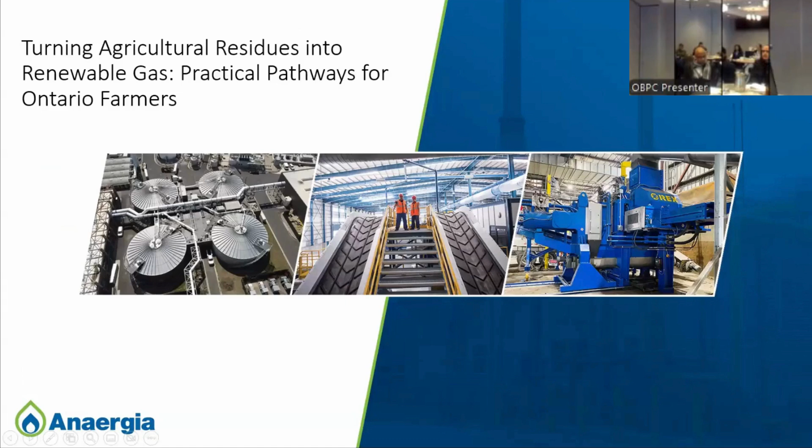Okay, let me just see if I can flip it forward. All right, works perfect.

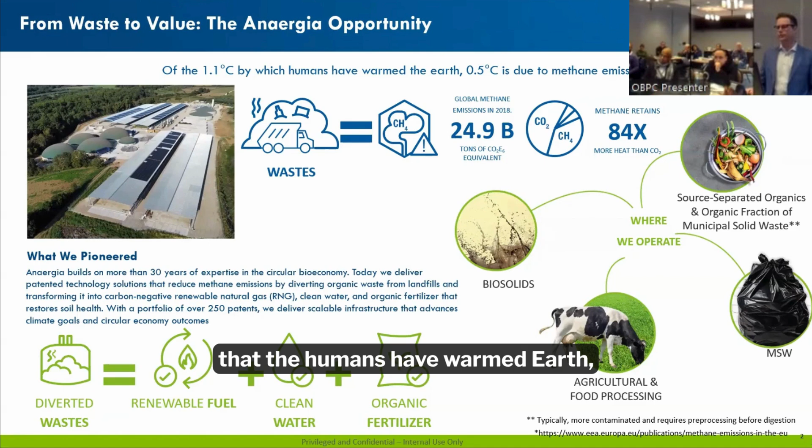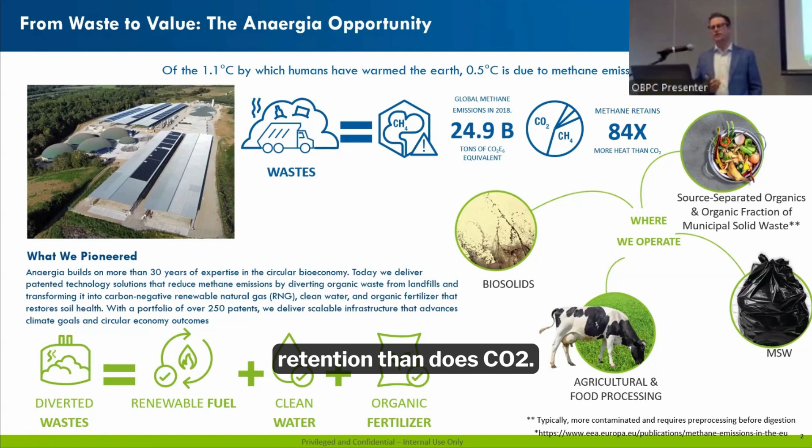So phrasing the problem first, the company Anaergia was developed around the concept of global warming. Of the 1.1 degrees Celsius that humans have warmed Earth, about half a degree comes from methane emissions. Methane emissions are particularly problematic because they have 84 to 85 times higher heat retention than CO2. So it doesn't get a lot of attention, but the actual methane emissions are quite problematic.

Where does methane emissions typically come from? Well, one place is landfills. We now have fairly good technology which comes from satellites, and we can look down on these landfills and watch the methane emissions leaking out of these stored waste facilities. It's actually a Canadian technology as well, called I believe GHGSat or something along these lines.

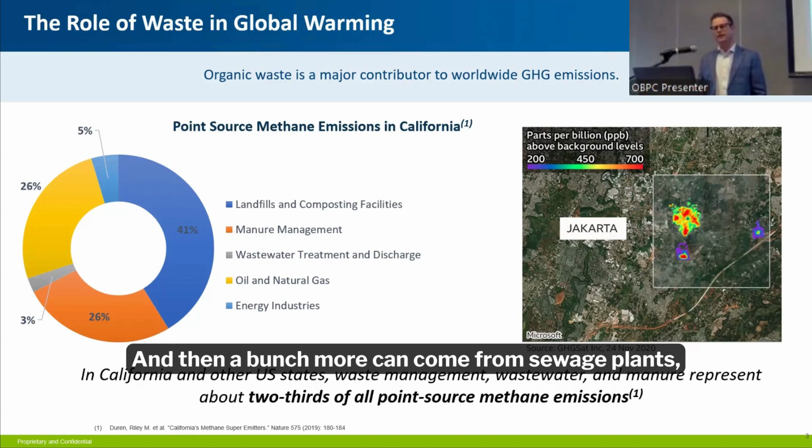41% comes from landfills and composting facilities. Another 26% can come from manure storage, and then a bunch more can come from sewage plants and leakage around oil and gas.

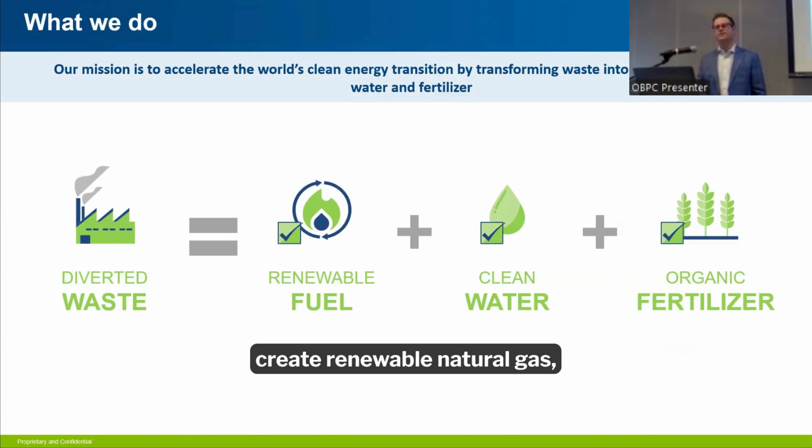So what we're looking to do as a company in general is take diverted waste, create renewable natural gas, create clean water, and then as a byproduct as well, generate some organic fertilizer.

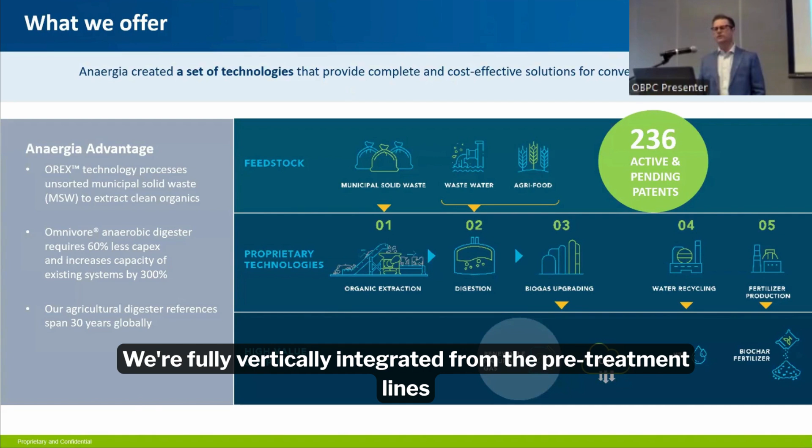Anaergia has a bunch of interesting technologies. We're fully vertically integrated from the pretreatment lines all the way down to the upgrading side of things, including some production of fertilizer products. But our real core technology is around the anaerobic digester.

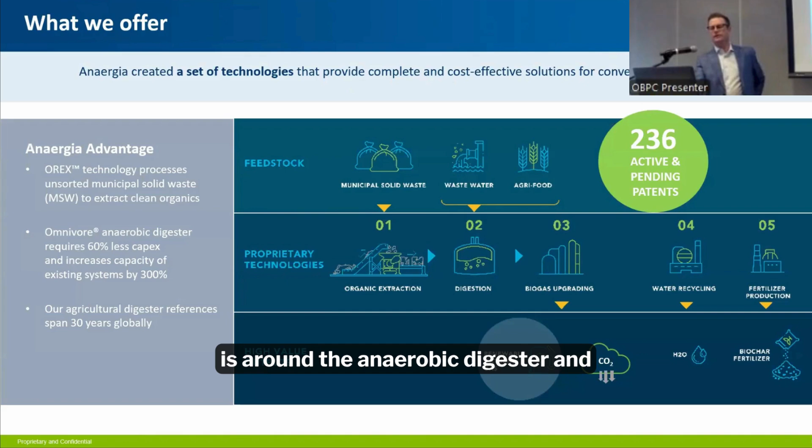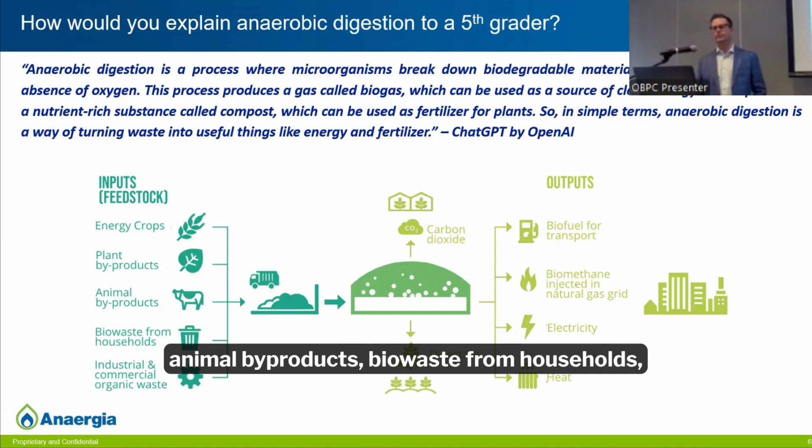Now we'll get into a more generalized view. So that was the company pitch, but now let's talk about anaerobic digestion in general. Here's a general block flow diagram, we would call this. You can see some of the feedstocks: energy crops, plant byproducts, animal byproducts, bio-waste from households, industrial waste.

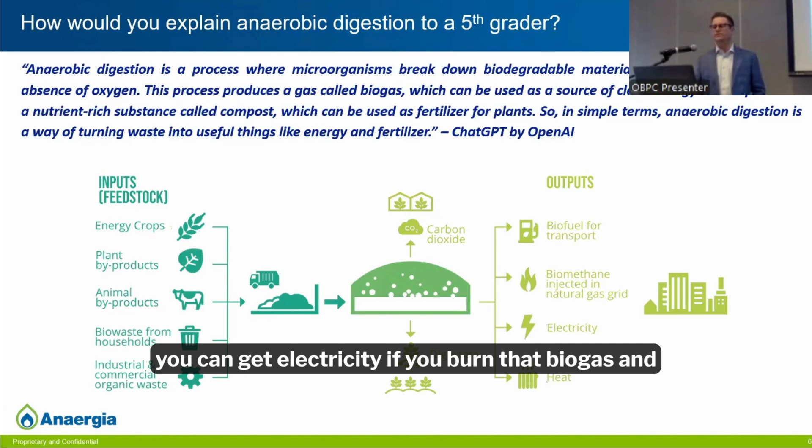Put it all into a tank that has no oxygen, and out of it you can get your renewable biogas. You can get electricity if you burn that biogas, and you can also get heat if you burn that biogas. And then we get this nice liquid called digestate, and that can be used as a fertilizer.

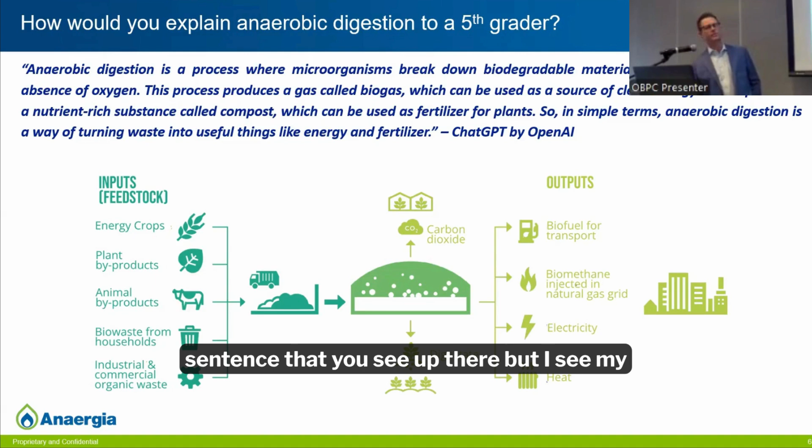Of course, now we all turn to AI for our answers, and if you ask AI how to describe anaerobic digestion to a fifth grader, it's a sentence that you see up there, but I see my face is cutting off at least a portion of it.

So why anaerobic digestion? I do truly believe that it's the right solution within the value chain for organic waste. You get to take manures and agricultural residues like straw, stover, spoiled crops, and you can even purpose-grow some secondary crops as well and turn it into renewable electricity.

It's also nice because it's decentralized. Most cases you have anaerobic digesters either on farms or somewhere at a municipal wastewater treatment plant. So you're not creating the electricity all in one large mega plant.

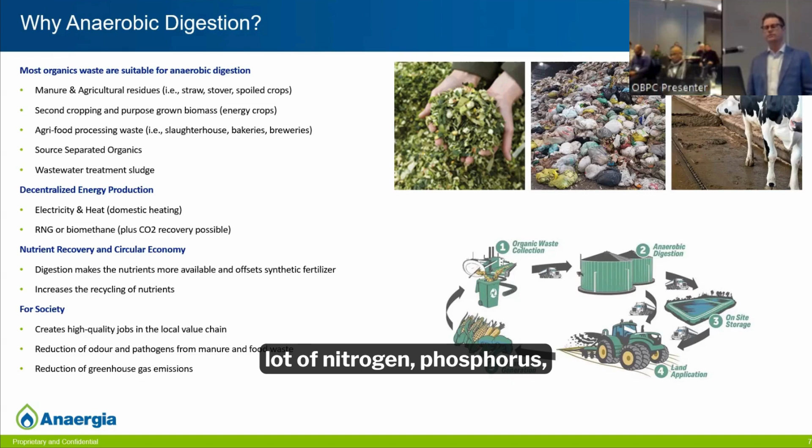And then nutrient recovery - you can pull a lot of nitrogen, phosphorus, potassium out of anaerobic digestate material. And then from a society perspective: new jobs, green economy, and an overall reduction in greenhouse gas emissions, like I mentioned.

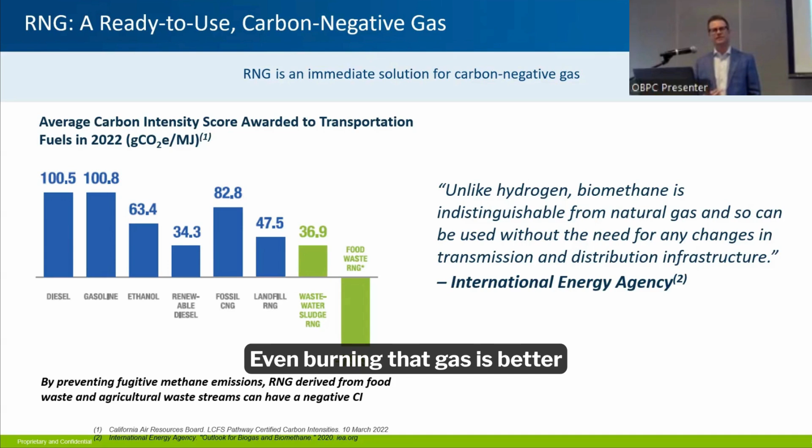There's lots of talk out there about what's the best green fuel on the market. What we know is renewable natural gas is about the only carbon negative fuel on the planet, and it's hard to understand how burning a fossil or burning a gas can create a negative emission. The reason, if we go back to the first slide, comes from the fact that methane has such a high global warming potential. Even burning that gas is better than letting it release to the environment.

So we are taking food waste that would otherwise rot in a landfill, converting it into renewable natural gas, and offsetting a fossil gas.

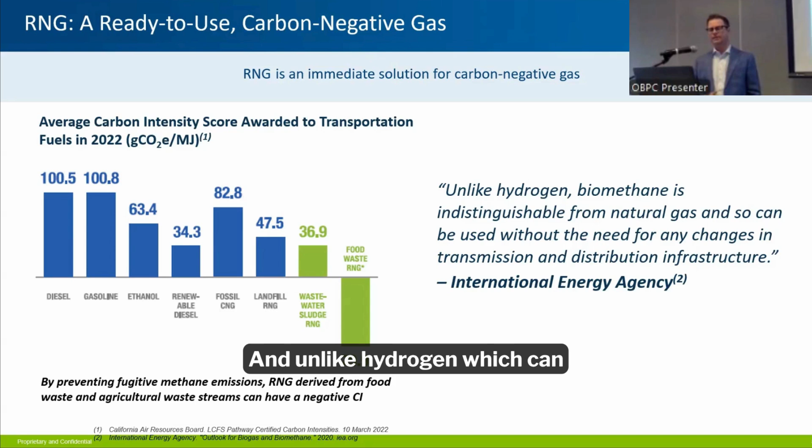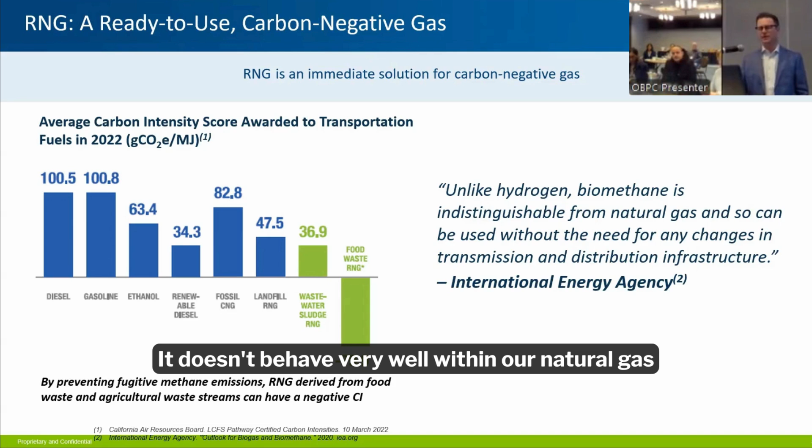And unlike hydrogen, which can be considered another green alternative, it is very compatible with our existing infrastructure. Everybody has natural gas for the most part, at least in cities and industries. We have natural gas. Hydrogen is a little trickier - you can't transport it very easily, and it doesn't behave very well within our natural gas grids, but we do have existing natural gas infrastructure.

So a little bit about the technology side of things. Anaerobic digesters appear in a few different forms. This is a very typical type. You'll see these at a lot of wastewater treatment plants, and at most of the on-farm digesters across Canada and certainly elsewhere around the world.

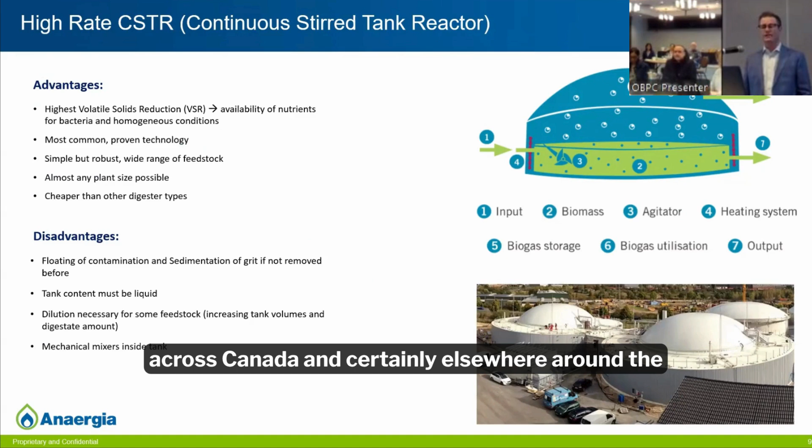These are CSTRs, continuous stirred tank reactors. They are essentially a big tank. They form some kind of agitation. You add your feedstocks into them, you mix, biogas comes out, and then periodically you pull out the material, which we call the digestate.

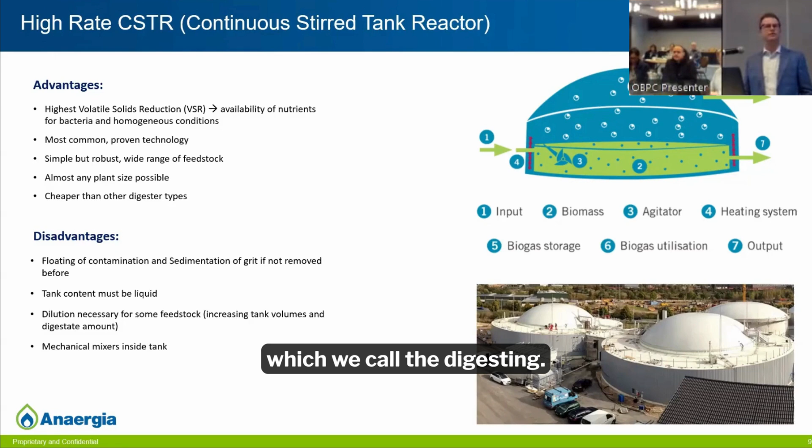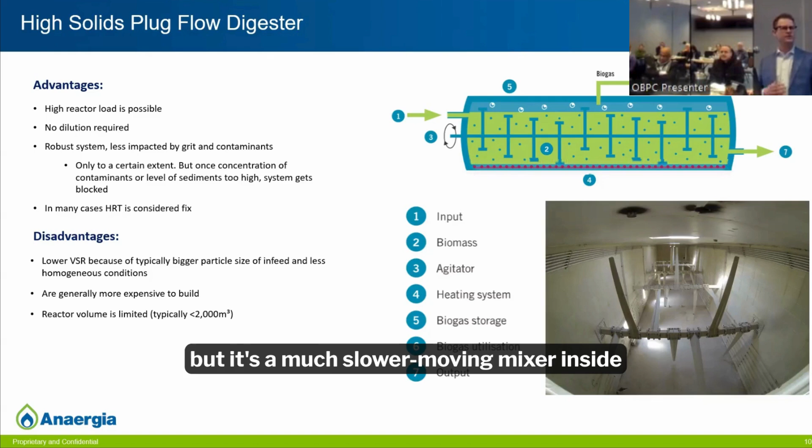Another type is called a high solids plug flow digester. These ones are more like a highway. You add the material at one end of the digester, and they continuously move down the pathway all the way to the other end. You typically do have a mixer, but it's a much slower moving mixer inside of the digester. And this one helps to break down crust formation and pull material under the digester.

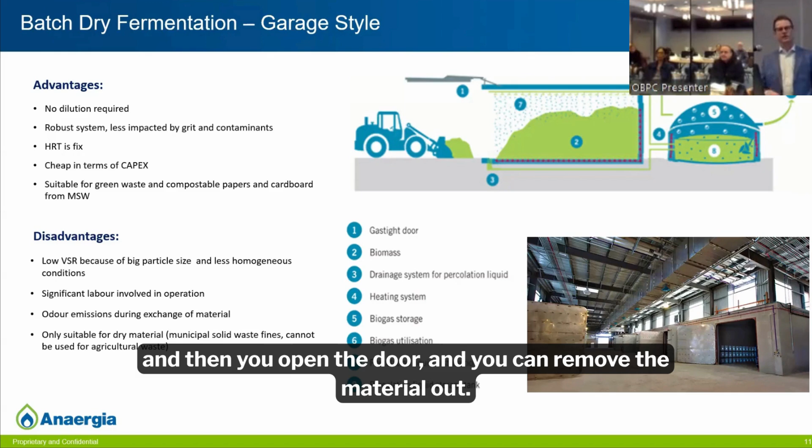There's also another type called garage style or batch dry fermentation. This is more typical in MSW, municipal solid waste. So where you would take kind of very crude, dirty looking material from municipal solid waste, you put it into these big garages, you close the door, and then you run them for a period of sometimes 10, sometimes 20 days. And then you open the door and you can remove the material out. Much more common in solid waste.

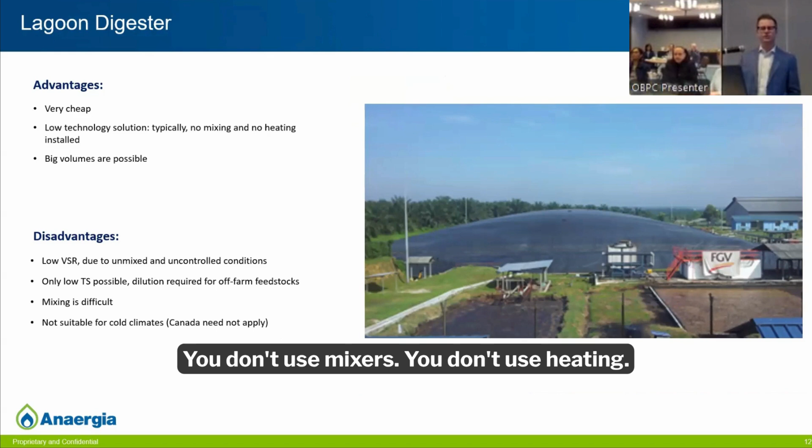And then lastly, the big dairy farms down in the US, the 10,000 cow dairies, they'll use more of these lagoon style. So lagoon style, very cheap, very simple. You don't use mixers, you don't use heating. So they tend to have very low volatile solids destruction, and they can be challenging to manage when they fill up with solids.

So back to the feedstock side. So we know the digesters that we would be feeding around the world. These are generally the most typical feedstocks that you'll put into an anaerobic digestion facility. On the left, you have the lowest contamination, and then far on the right, you have the highest contamination. So your typical manures and harvested crops, they're actually the easiest because they're very pure. They don't contain very much contamination. And in general, they have a modest biomethane potential.

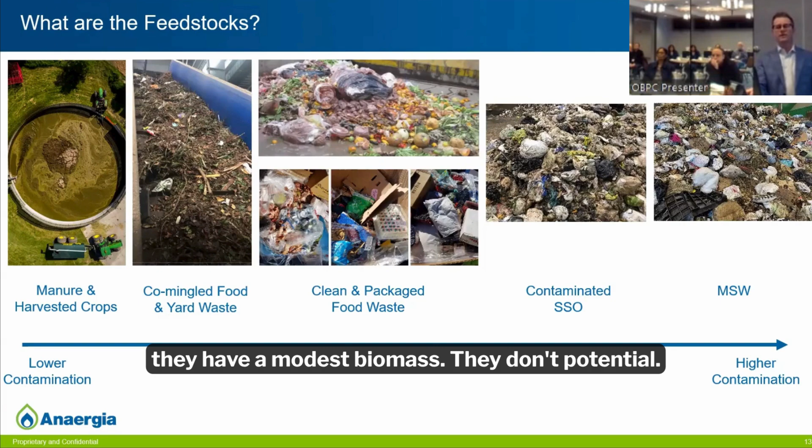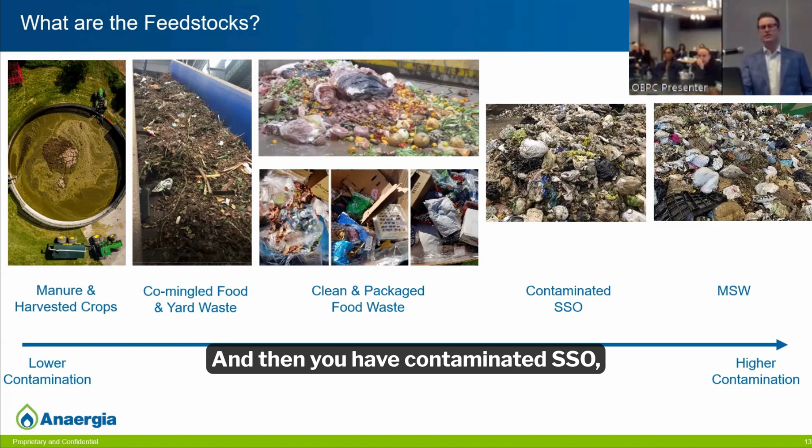As you kind of move along towards the right, you get commingled food and yard waste. This is kind of like your green bin material that you pick up if you're doing a very good job at source separating. And then you get into clean packaged food waste. This is like a grocery store or a cafeteria. And then you have contaminated SSO, which might come from a city collection, and then MSW, municipal solid waste.

So when we talk about the Ontario side, maybe a large or a modest sized dairy of 500 herd, it might produce around 10,000 tons per year of manure. And this might produce about 170,000 cubic meters of RNG.

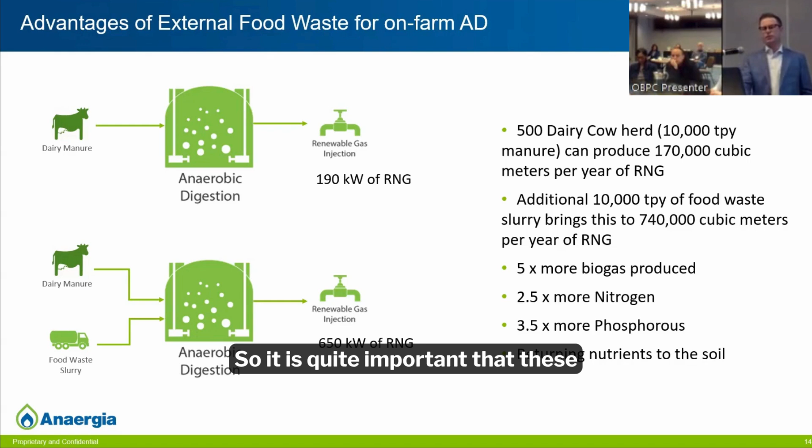What's really important for a lot of these on-farm digesters is the addition of external liquefied food waste. And the reason being is it generates about 5 times more biogas, even if you put in about the same quantity. It also brings in a considerable amount more nitrogen, a lot of additional phosphorus, and those all can ultimately be returned nutrients to the soil. So it is quite important at these on-farm digesters that they do have the ability to bring in external feedstocks.

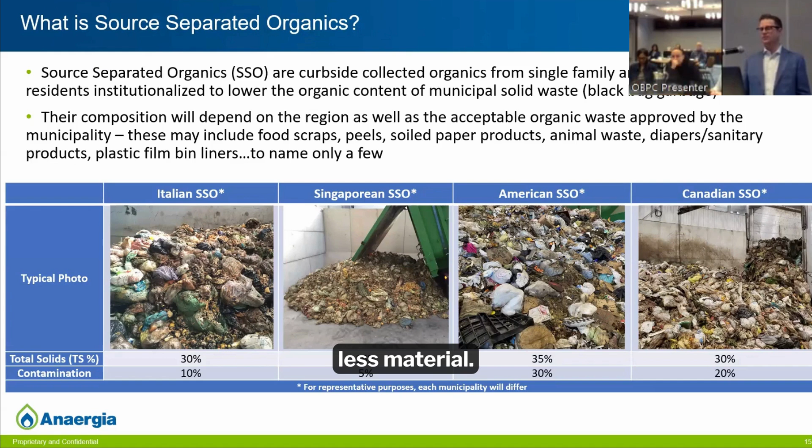Around the world, there's a bunch of different types of curbside collected source separated organics. This is one of the more abundant materials that needs to find a home. You have Italian SSO, which could have a considerable amount of packaging. Singaporean or Asian SSO tends to be wetter with a little bit less material. And then you get the American and Canadian, which tends to be quite dry and quite high in contamination.

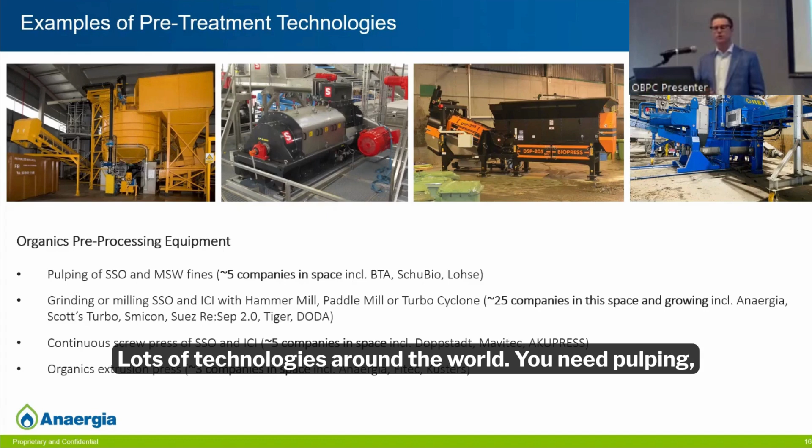So all those materials, believe it or not, can produce a quite clean organic slurry that can be used within anaerobic digestion. Lots of technologies around the world. You need pulping, which is almost like a big smoothie maker. You blend the whole material up and then scrape out the packaging. There's a lot of hammer mill technologies, and there's even some that you exert an enormous amount of pressure on it and you kind of squeeze out the organic material.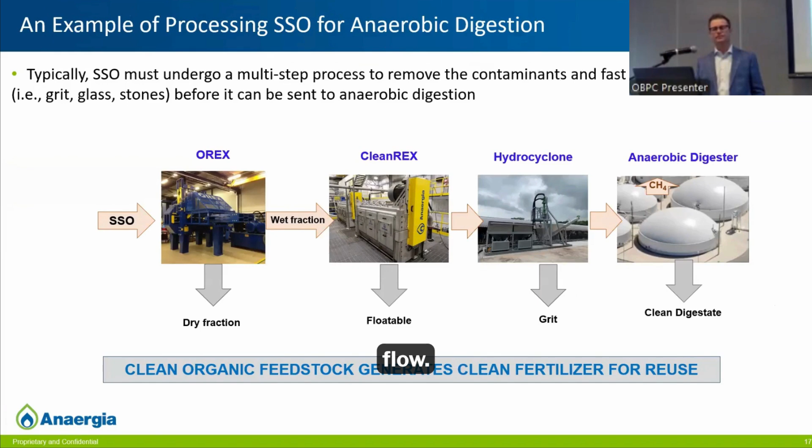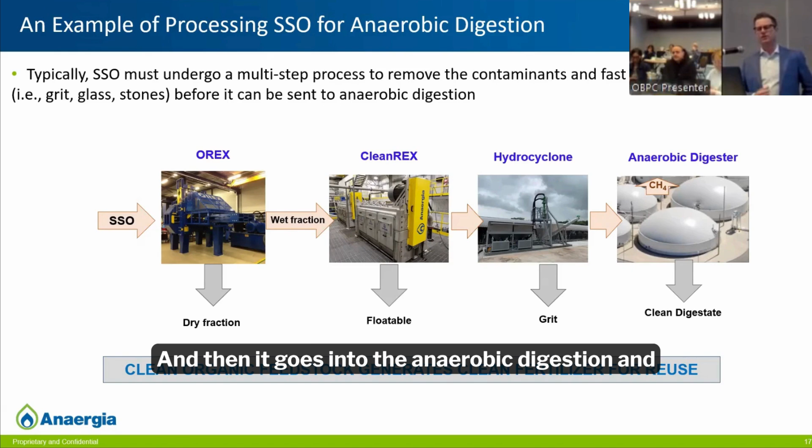So this is just a typical flow. So you'll bring in this source separated organics. It's collected from the green bins. You process it through some type of machine, in this case, for example, an Orex, where you're squeezing out a wet fraction or an organic material. Then you have to polish it. We use something called a hydrocyclone, typically to remove the glass and stone and grit. And then it goes into the anaerobic digestion, and it can create a clean digestate.

So believe it or not, here's what it looks like.

Good thing we didn't go before lunch.

But there's a scoop, a tractor bucket load of what would be considered source separated organics. It has, let's call it, somewhere between 20 and 30% contamination. And those go into pre-processing lines. And that pre-processing line spits out something that looks like that kind of minestrone soup or that oatmeal texture. And it has as low as 0.1% plastic and another, say, 0.3% contamination. So you can get quite clean, actually.

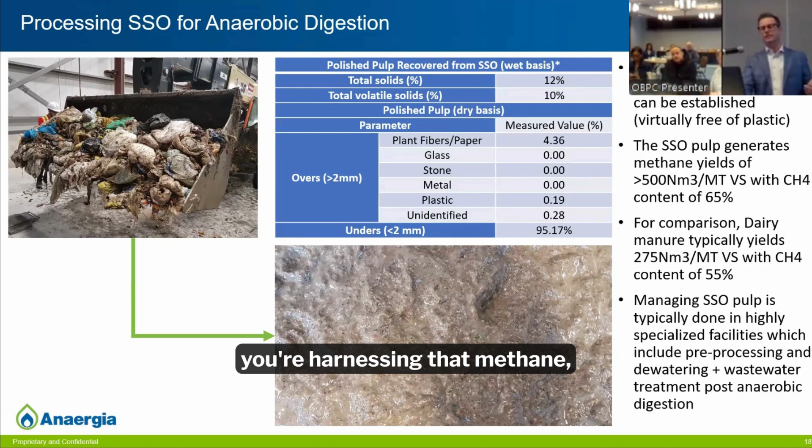And that material is very biodegradable, excellent biomethane potential. And because you're keeping it out of landfills and you're harnessing that methane, it's contributing quite dramatically to greenhouse gas emission reductions.

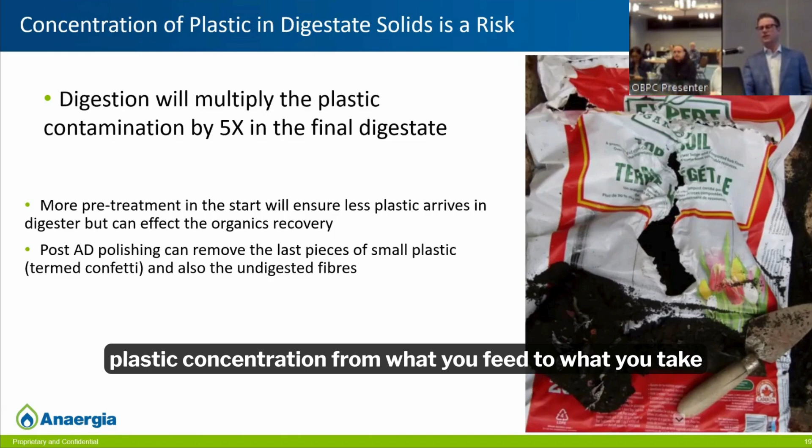One of the main problems is when you go through the anaerobic digestion process, you do actually concentrate the plastic material. That's because the food waste decomposes, manure, straw, whatever you fed in, it decomposes, but the plastic stays in suspension. And so you can actually 5x increase that plastic concentration from what you feed to what you take out. But good digestate doesn't need to have plastic in it.

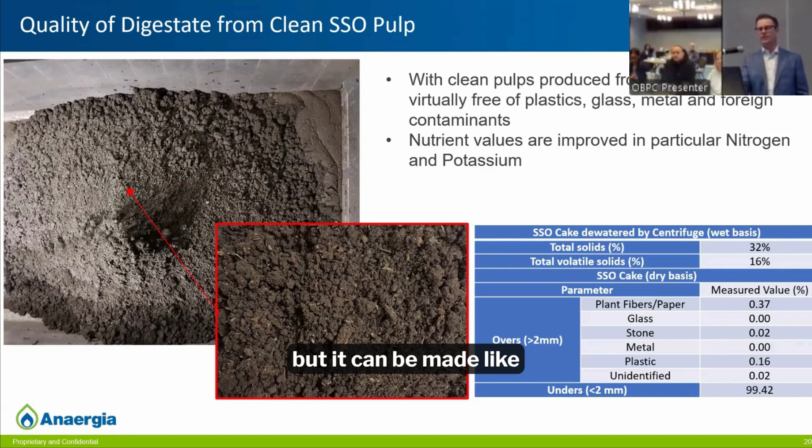Here's an example as well of a farm-based digester that's brought in organic, source separated organic material that's quite clean. And here is what the final product looks like. You can see on the plastic side of things, it's only around 0.16% plastic on a dry solids basis. And this material could be cleaned up further, of course. You'd love to see 0.0 there on the plastic, but it can be made like this and quite clean. Great source of potassium, also quite high in nitrogen.

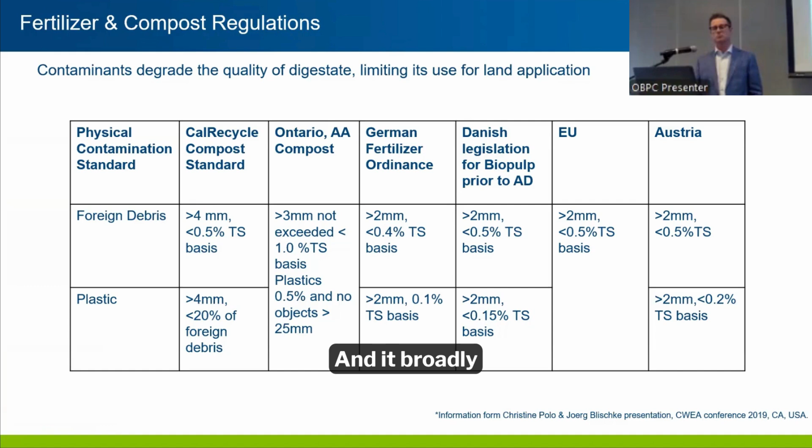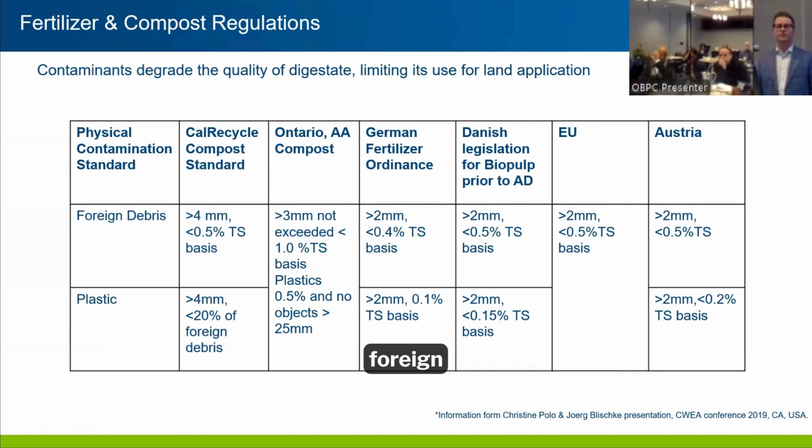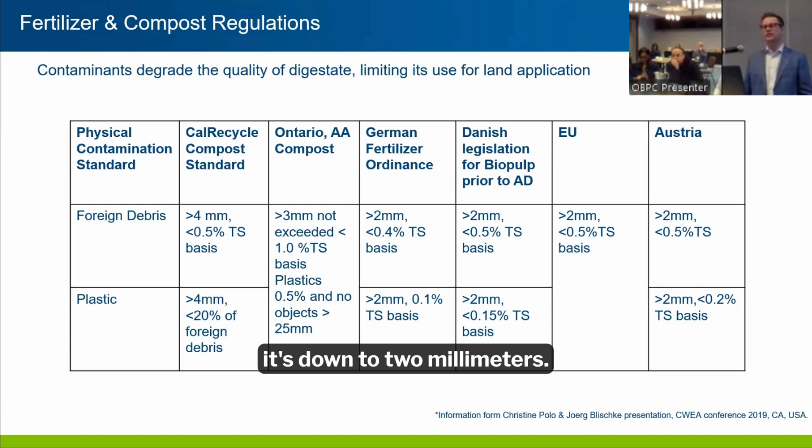On the world scene, here is what we consider to be quality digestate, and it broadly varies by country and by region, but here is the kind of foreign debris and plastic contamination specifically. In CalRecycle, for example, they consider foreign material greater than 4 millimeters. It's a bit arbitrary. You see in Ontario, it's 3. And you see in other places in Germany and Denmark, it's down to 2 millimeters. But the percentage is around, say, 0.5%, of which 20% can be plastic and varies by region.

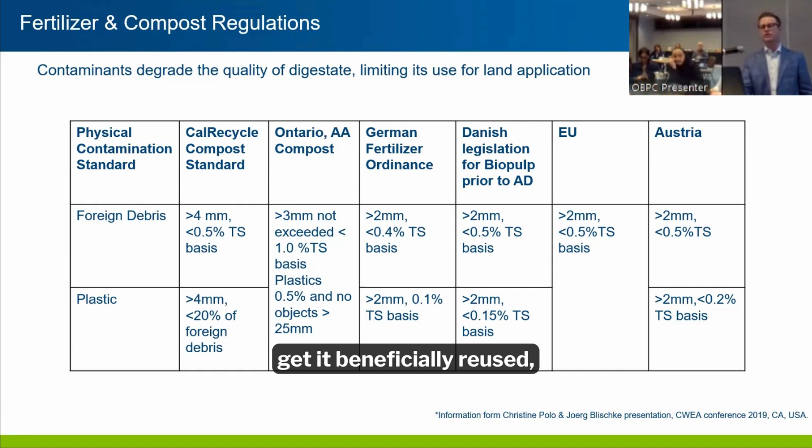Today, there's more than 20,000 biogas plants and biomethane plants across Europe. And the sector did experience a few booms from 2009 to 2014. This was incentivized by government, by the way, where the governments provided guaranteed feed-in tariffs for electrical production. And then that was followed by a steady growth right through to 2023, where the market continues to grow year over year.

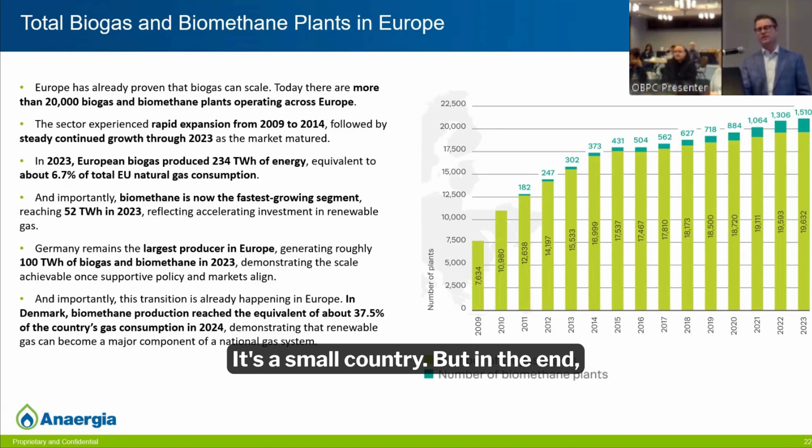An interesting fact is 6.7% of the EU's total natural gas actually comes from biomethane. So this can make a considerable influence on the overall natural gas mix. Germany still remains the largest producer in Europe, and they generate about 100 terawatt hours of biogas and biomethane. That was in 2023. And that does demonstrate that once scale is achieved, you can actually do a considerable amount of improvement. The best country in terms of offset is Denmark. Currently, 37.5% of their overall natural gas comes from biomethane. It's a small country, but in the end, it's a pretty sizable amount of natural gas.

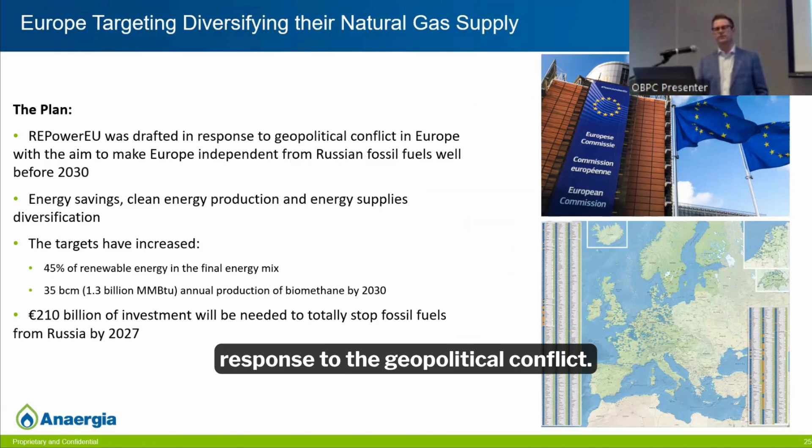And that just further elaborates on this. Huge investment, €210 billion of investment will be needed to totally stop fossil fuels from Russia by 2027. And all of these goals are through the REPowerEU, which is a response to the geopolitical conflict in Europe, aiming to get further action by 2030.

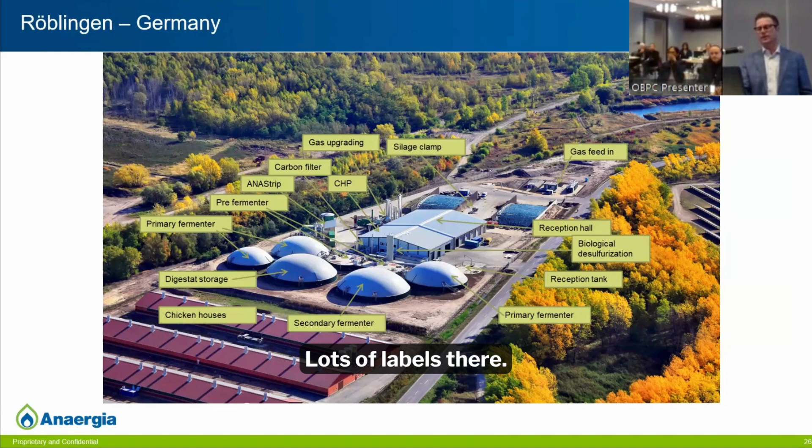So I thought I'd take you through some of these facilities, what they might look like. So here's a quite beautiful plant in Germany. You can see there's some broiler barns out the front of the photo here, and they're taking those materials and they're sending it directly into these anaerobic digestion facilities. Lots of labels there. I think what's critical is the tanks with the big domes on top of them are the actual anaerobic digestion systems. Some of them are also used for digestate storage.

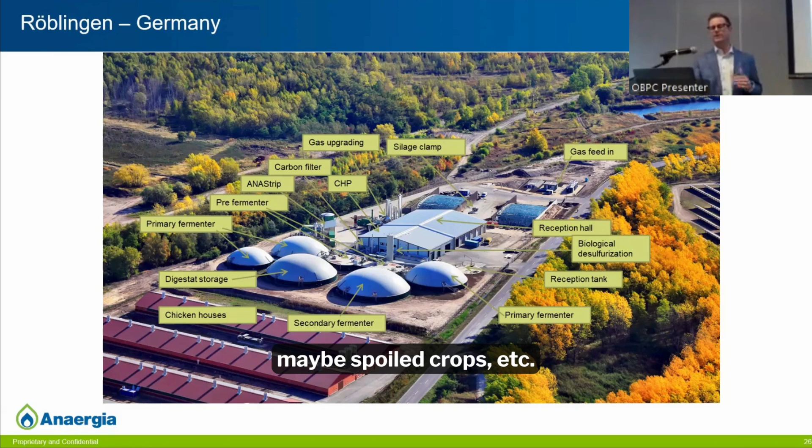And then inside of the big building, that's where they're receiving a bunch of different feedstocks. So these are the kind of facilities that will bring in from neighboring farms. You know, you kind of co-op together. You have manure, straw, leftover maybe spoiled crops, etc. You bring it into the facility, you dump it in the reception hall, and then they use these big solid feeders to feed the material into the plant.

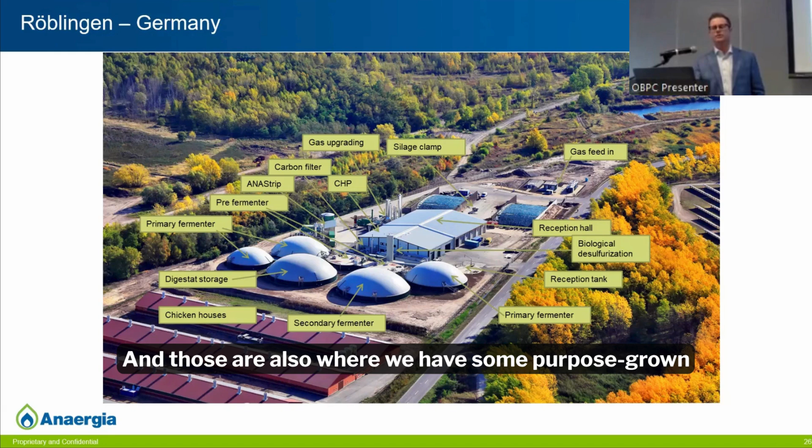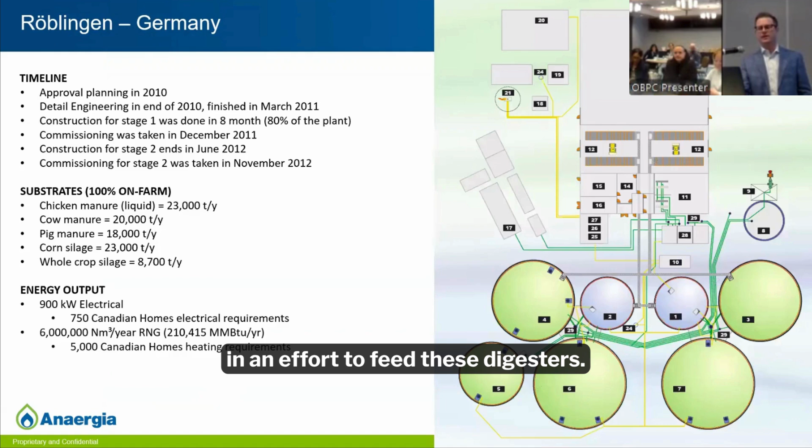And in the top of the picture, you can also see the silage clamps, and those are also where we have some purpose-grown crops as well. Europe was never shy about purpose-growing corn silage, even some hay and other grass crops, in an effort to feed these digesters.

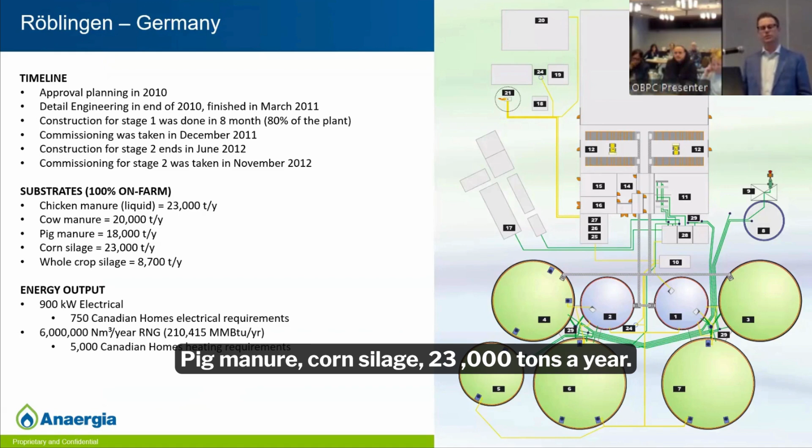You can see here the kind of breakdown of material. So lots of chicken manure. In this case, it is liquid, 23,000 tons a year. There's cow manure, about the same amount, 20,000 tons a year. Pig manure, corn silage, 23,000 tons a year. And whole crop silage, 8,700. Now these vary year by year, but in general, that's the kind of feedstock mix that a farm like this needs to bring in to make a plant like this work.

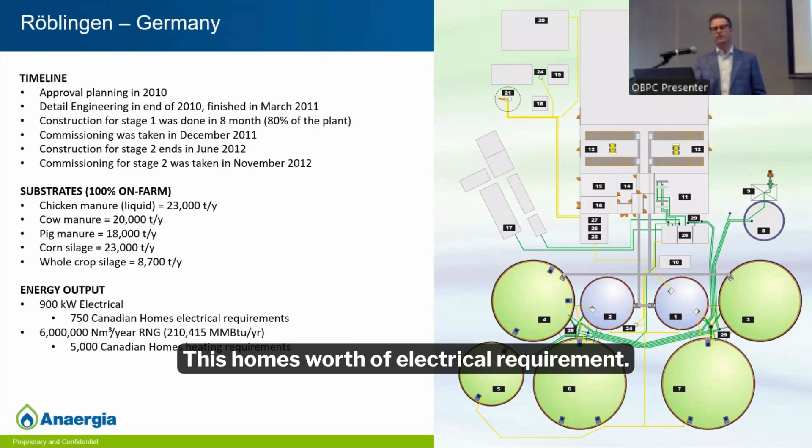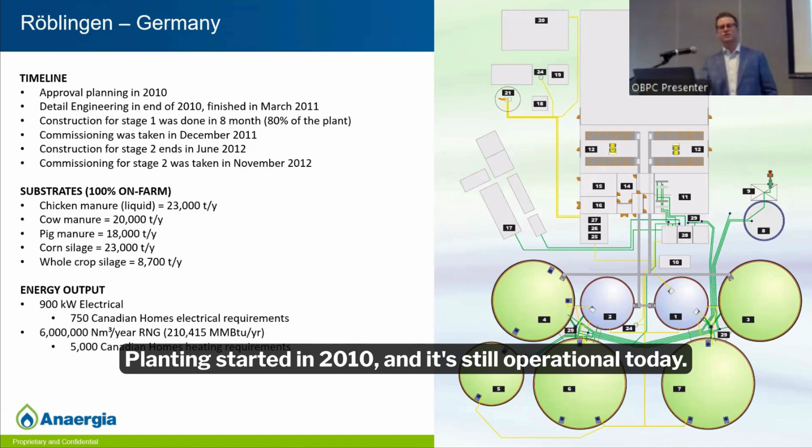This one is nearly 1 megawatt electrical. It's about 750 Canadian homes worth of electrical requirement, but they also generate a huge amount of what's called renewable natural gas, about 5,000 Canadian homes of heating requirement being produced on this facility. And you can see the age, its planning started in 2010 and it's still operational today.

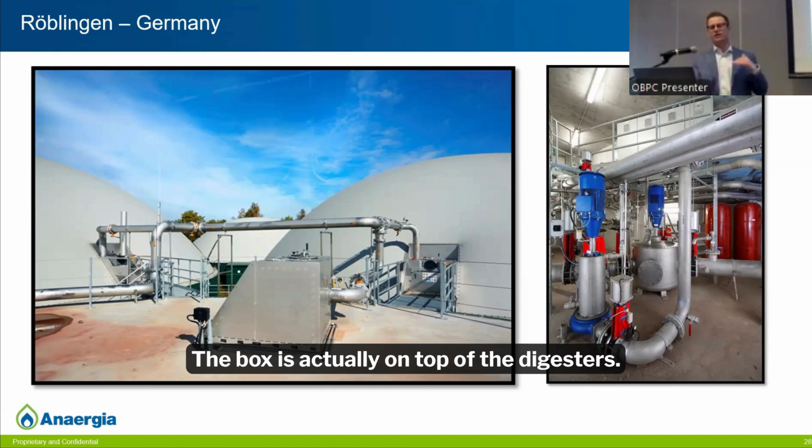Here are some other snapshots of what these facilities look like. They do definitely have modern technology in them. The image of the box is actually on top of the digester. So you're standing on top of a digester. Below that is the liquid that's being mixed and fermented. And then those on the right are images of the pumping halls where you have big stainless steel pipes moving this material around throughout the facility.

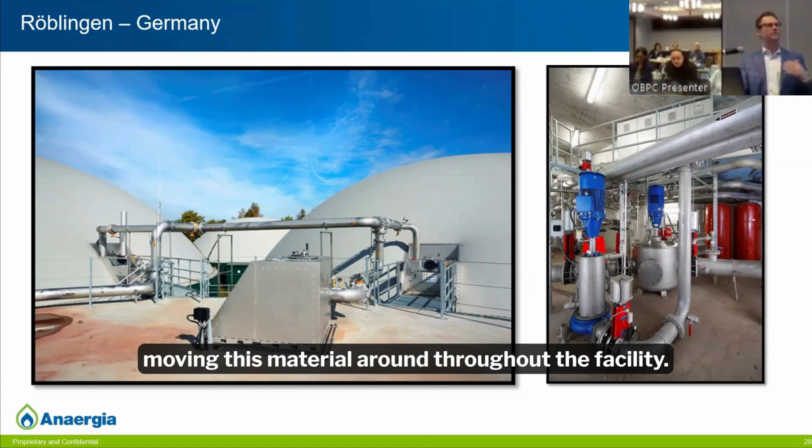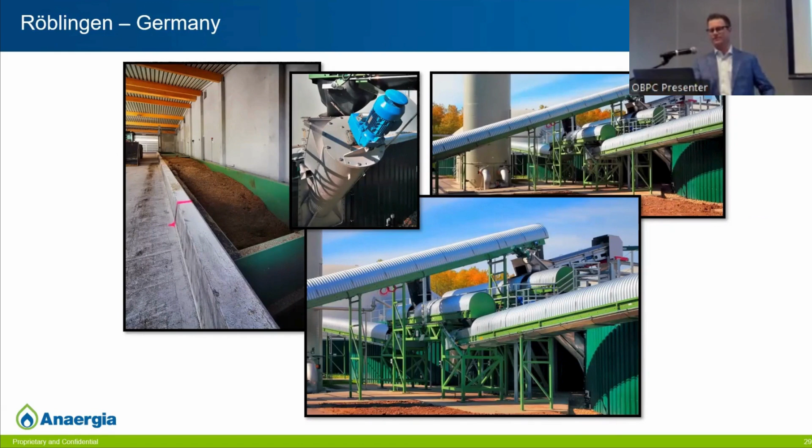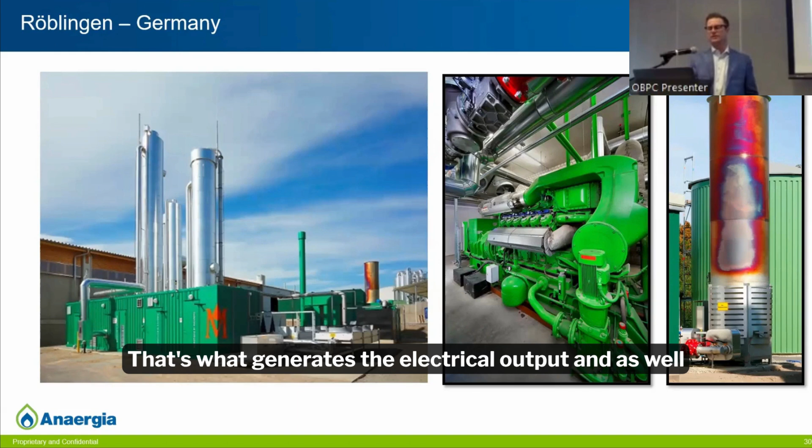And here are some of the reception halls where you have solid feeders taking all of those feedstocks I mentioned, the solid manure, the corn silage, etc., and then distributing it into those anaerobic digesters to generate the biogas. Some other images here, the big engines, CHPs, combined heat and power units. That's what generates the electrical output and as well the heat that is needed for the facilities.

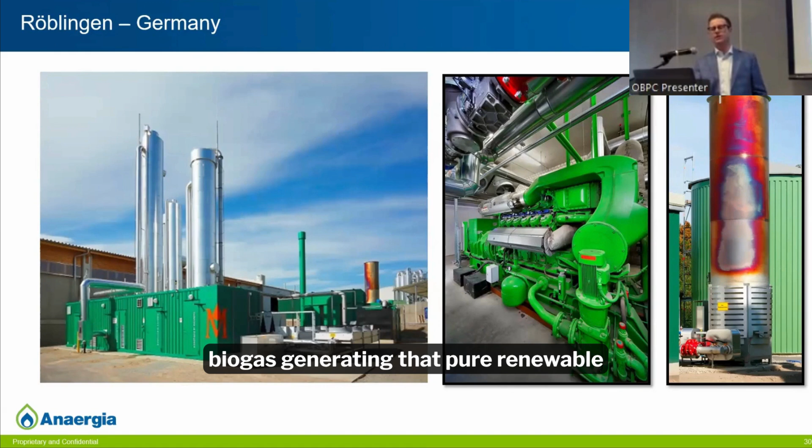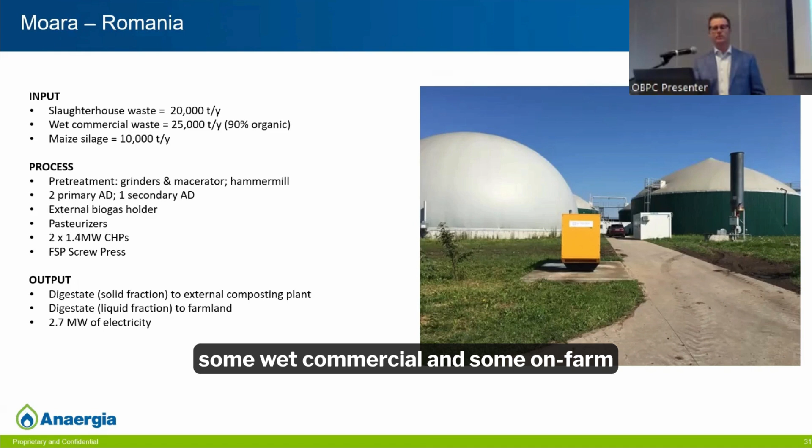And then in the image closest to me on the left is what's called a biogas upgrading system. So that actually removes the CO2 portion of biogas, generating that pure renewable natural gas. Some other facilities. This is one in Romania that we built going back, I think, about 15 years. It did slaughterhouse waste plus some wet commercial and some on-farm purpose-grown crops. 2.7 megawatts of electricity is the key takeaway.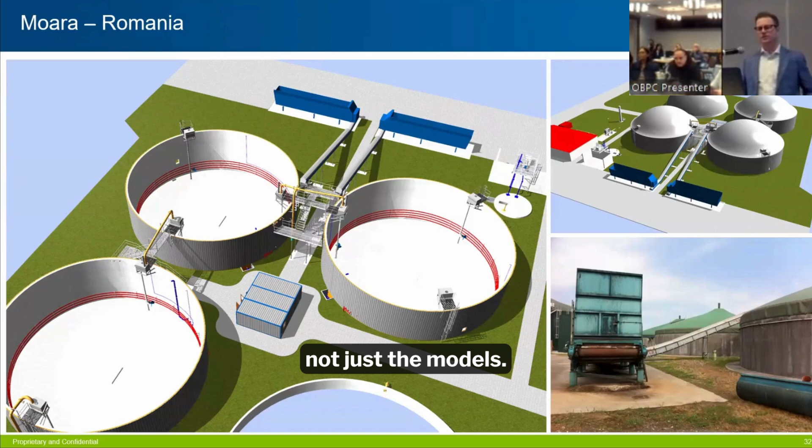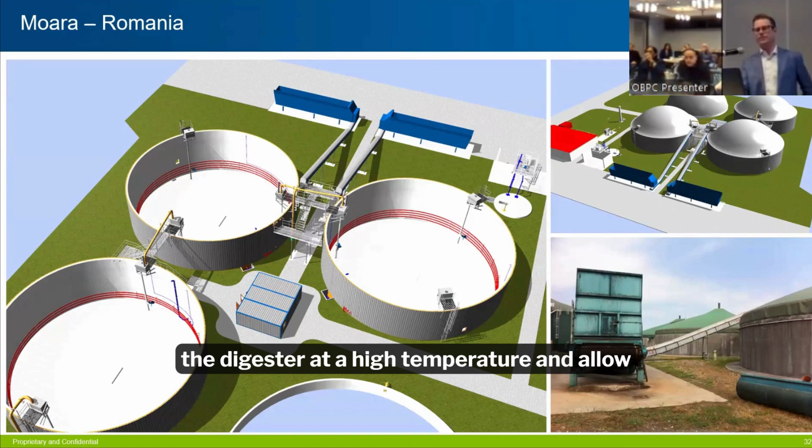And here's sort of what some of these facilities look like on computer renderings. These were used obviously for the engineering phase of the project, not just models. You can see that one interesting thing is the red rings on the inside. That's like heating coils. So those are actually provided to keep the digester at a high temperature and allow those bugs that degrade the feedstocks to turn them into biogas.

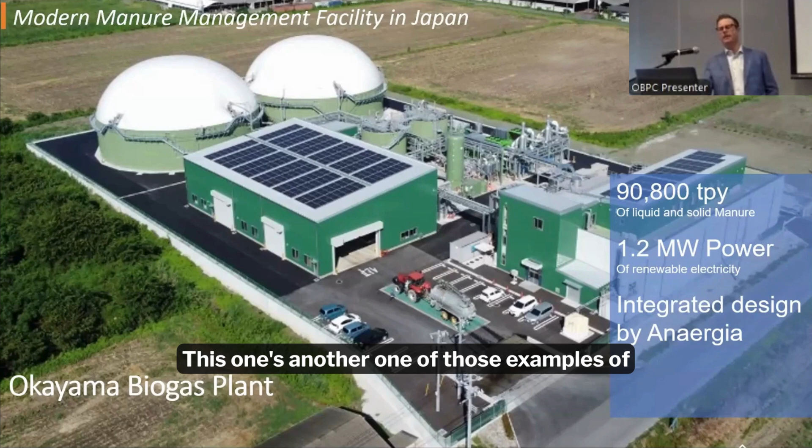Here's another facility built just a couple of years ago. It's a modern manure management facility in Japan, Okayama biogas plant. This one's another one of those examples of aggregation. So you can see the tractor in sort of the center of the picture. It's arriving to the plant. It's bringing in dairy manure from around the neighborhood and the yards. It's going to drop it off inside of that reception hall with the solar panels on top. It may even fill back up with digestate and take it back to their farm.

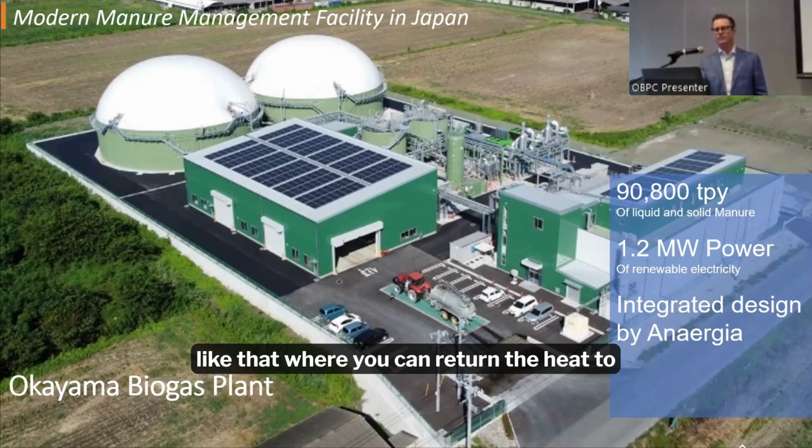So you have that circularity. You give the manure, you return with digestate, and so you don't lose any of the nutrient units. What you're giving back is the renewable natural gas component. This plant was interesting because it was producing 1.2 megawatts of power, yes, electricity, but it was also taking the heat and a portion of the CO2 and taking it back to a greenhouse. So there's other kind of symbiotic relationships like that, where you can return the heat to greenhouses, return the CO2, and grow more crops.

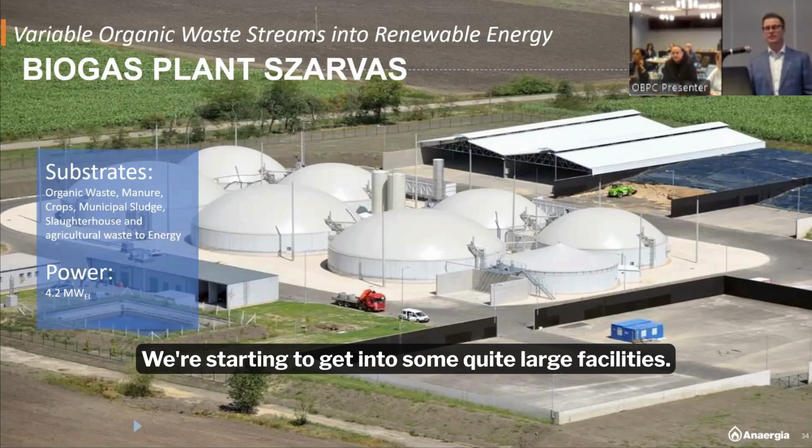There's another quite large facility in Szarvas, is what the name is, it's 4.2 megawatts. We're starting to get into some quite large facilities, and this one's been operational for over 15 years. It's based in Hungary.

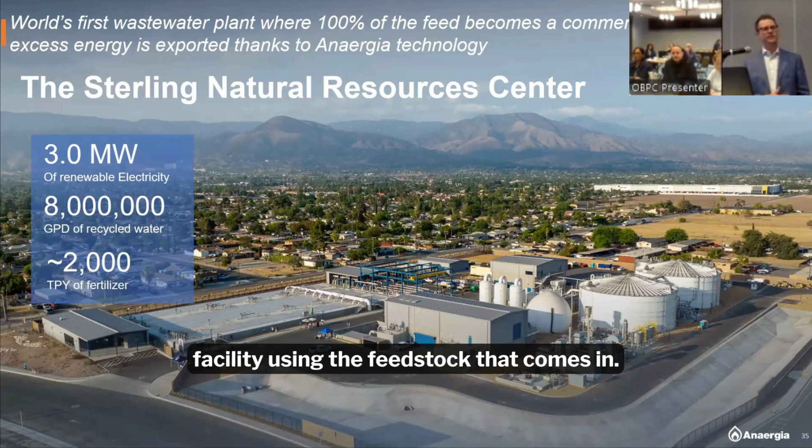This one is producing 3 megawatts of renewable electricity. It's combusting the feedstock in combined heat and power units, giving back the power needed to run the facility. So it's a nice circularity.

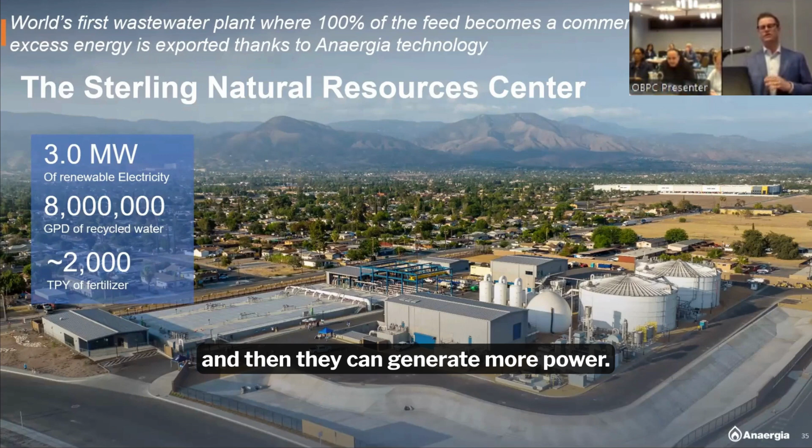They also do something called co-digestion, bringing in liquefied organic waste, digesting it on site, and generating more power. They also produce about 2,000 tons per year of fertilizer.

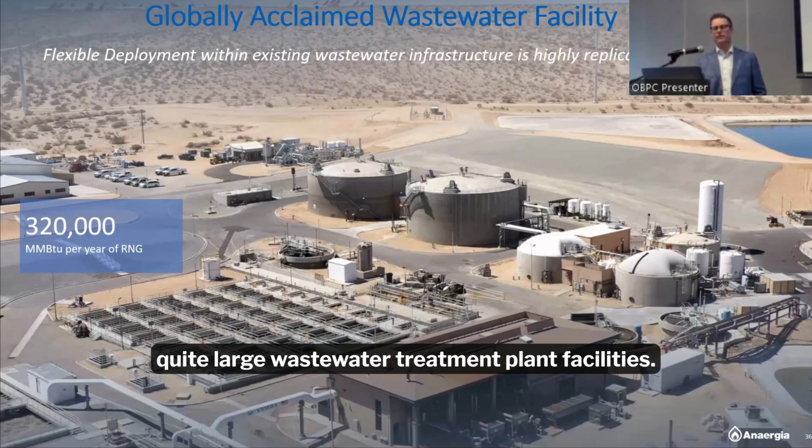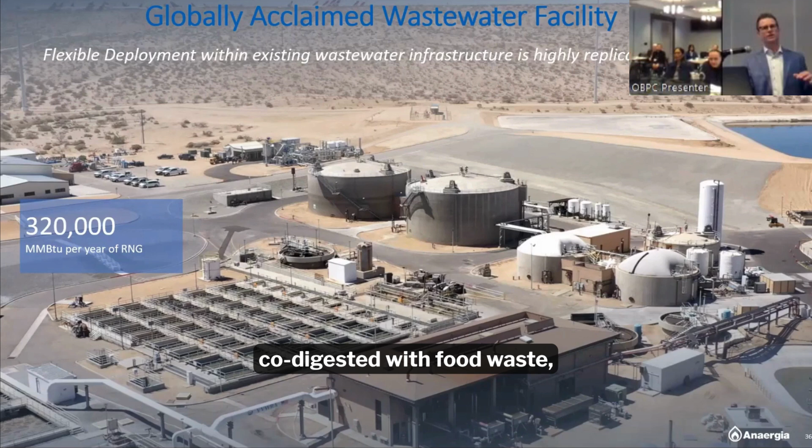Another example of one of those quite large wastewater treatment plant facilities—this one generates not electricity, but 320,000 MMBTU of renewable natural gas. Again, it's sewage sludge co-digested with food waste, generating renewable natural gas.